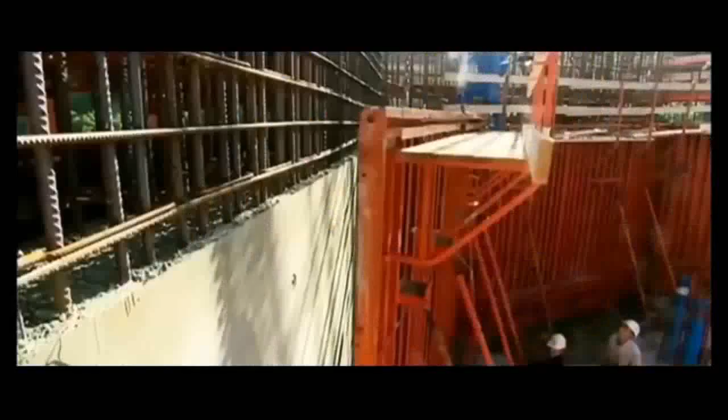When I've shown first the drawing of this bridge, they really thought I was crazy. The team attempting to build this amazing freeway in the sky had to survive landslides, fight winds gusting at 130 kilometers an hour, and weather massive storms as the bridge simply hung in the balance. It's a bridge that pushes the boundaries of engineering to the limits, and then beyond.

Imagine building a series of Eiffel Towers, then slinging a 4-lane highway between them, all the way across one of the deepest valleys in France. Impossible though it sounds, that pretty much describes the building of the Millau Viaduct.

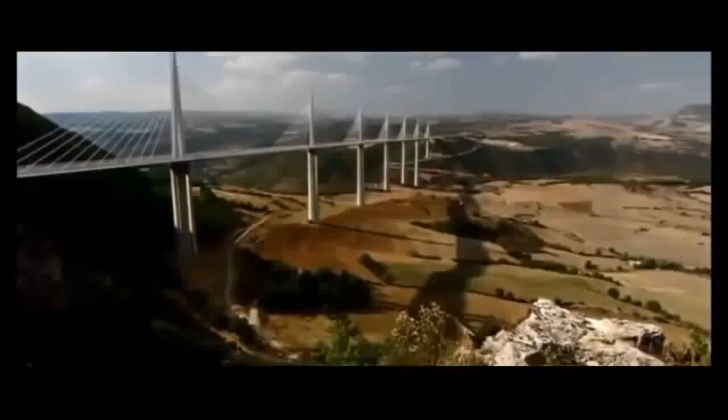From the start, the construction team faced 3 daunting challenges. One: build the tallest bridge piers in the world. Two: put a 36,000-ton freeway on top of them. And three: erect 7 steel pylons, each weighing 700 tons.

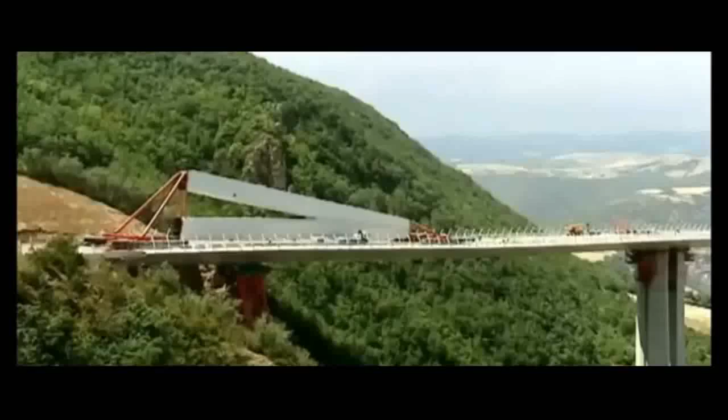And what's more, they had to do this hundreds of meters above solid ground. So high that if you were on top of the Eiffel Tower, you'd still be looking up at this awesome bridge.

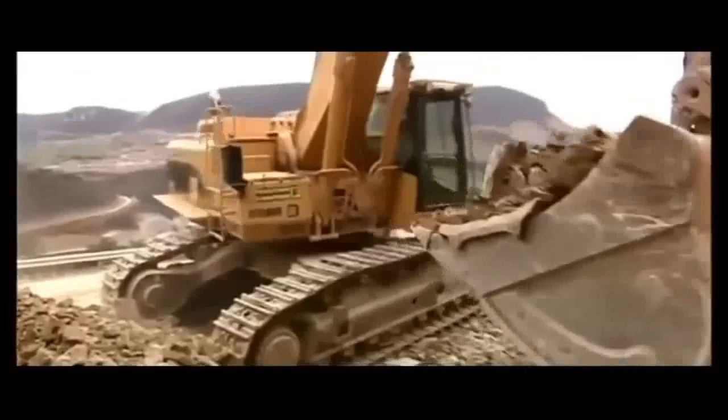October 2001, the team break ground. They're required to build a bridge that'll last for 120 years. And to win the contract, the teams promised to build it in record time, less than 4 years. By comparison, the world's longest suspension bridge, the Akashi Kaikyo in Japan, took a full 10 years to build.

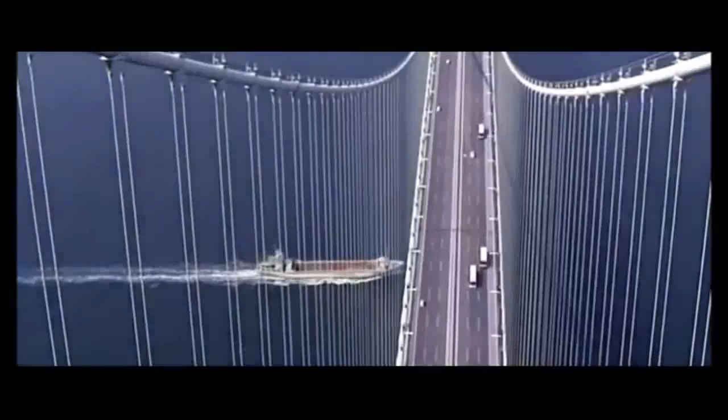To up the ante, any delay will cost them $30,000 a day in penalties.

There are 7 piers that are numbered from the northern end of the valley. Number 1 will pose problems because of the steep slope. Number 2 will be the biggest challenge since it's the tallest. Crossing the river, number 3 is not much shorter. Then 4, 5, 6, and 7 climb the gentler slope to the south.

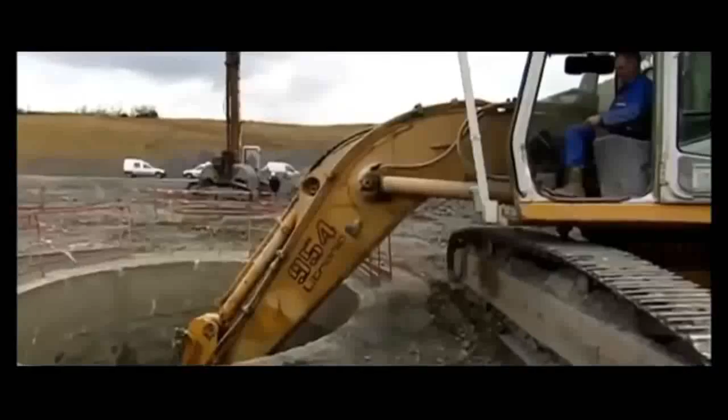To begin, the team had to bury the foundations deep in the bedrock in order to support the enormous weight the bridge will place on them. But the forces of nature were stacked against them.

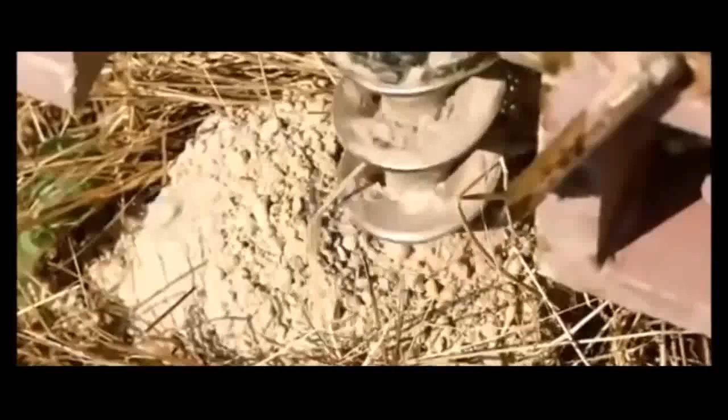Geologists have warned of the risks posed by the region's fractured limestone. The rock is full of cavities that are essential to the local cheese economy. These cave systems, close to Millau, are home to a unique bacteria responsible for the blue mold in the world-famous Roquefort cheese. But what's perfect for cheese could be disastrous for a megastructure.

The geologist's diagnosis spelt one thing: landslides. This kind of catastrophe could jeopardize the entire project. Despite the warnings, building went ahead as planned.

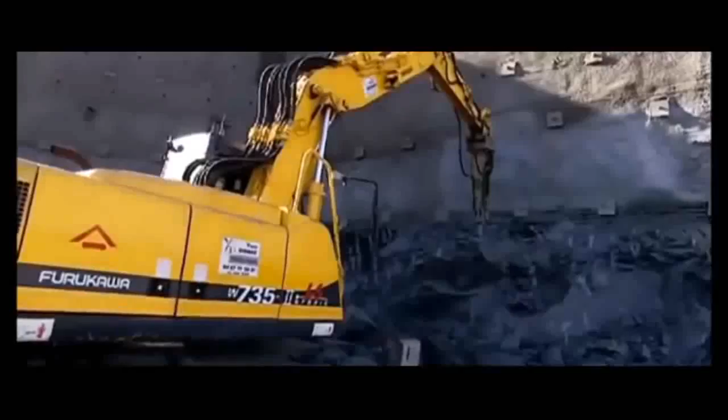Then, well into construction, as predicted, a dramatic storm causes a landslide. 4,000 cubic meters of rock collapse around Pier 1. Fortunately, the fallen rock doesn't damage the pier, but the warning is clear. They're forced to divert precious manpower and equipment to stabilize the slope and prevent a repeat collapse.

So if the area is prone to landslides, why did they build the world's tallest bridge here in the first place? The answer is simple. In the 1980s, France built a freeway linking Paris directly with Spain. This major artery headed south across the French countryside, while from the Mediterranean, the freeway headed north, until they both hit one of the deepest valleys in France and stopped dead.

Welcome to Millau, France's least favorite bottleneck. The town of Millau is in the mountainous region of the Massif Central, one of the most tranquil parts of France. But in summer, this poor medieval town suffered traffic hell.

The locals couldn't take it anymore. Neither could their mayor. It was terrible for our reputation. When you hear every day on the television and radio, avoid Millau, there's a traffic backup, a 5-hour wait in Millau.

And it's not just the people of Millau. Two drivers, Jamila and Jemima, crossing the 30-odd kilometers between the freeway on either side of Millau, reveal exactly why this bridge is needed. Jamila, in car 33, will cross the new bridge, while in car 22, Jemima will take the old road across the valley floor.

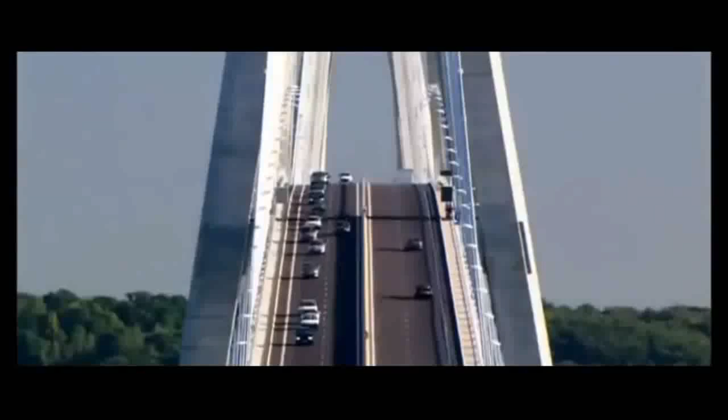With this record-breaking structure completed, Virlogeux was on to his next, Millau. His plan, another cable-stay bridge, but pushing the technology beyond anything previously attempted, with piers 4 times higher than the Normandy Bridge.

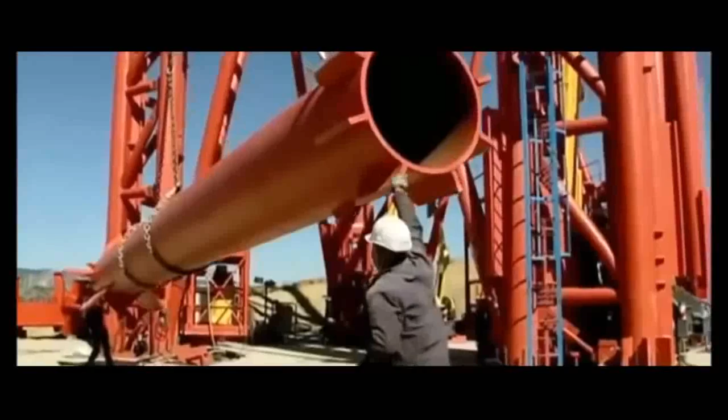The Millau Bridge would not only be the world's tallest, it would be unlike any bridge ever constructed. When I first showed the drawing of this bridge to the government authorities, they really thought I was crazy.

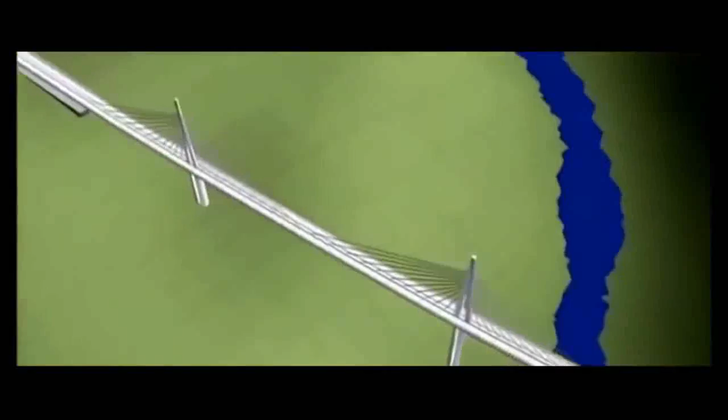Virlogeux's Normandy Bridge has two sets of cables supporting the deck, but he wanted to up the stakes for Millau by losing one row of cables, so the remaining line would be forced to do twice the work. More dramatically, the 2.5-kilometer Millau Bridge, instead of having a single main span, needed a whole series of piers to support it across the valley. No bridge builders had ever attempted a multiple-span, single-line cable-stay bridge on this scale before.

The French authorities had a problem. Nervous about Virlogeux's groundbreaking scheme, they held a competition inviting other engineers and architects to compete with different designs. The winner, Lord Norman Foster, is one of the world's superstar architects.

In Hong Kong, he built the world's largest airport terminal. In Barcelona, offices literally hang from a mast on his communications tower. This is a man who regularly contemplates the impossible and delivers.

It's the challenges, one challenge on top of another, on top of another. And with Millau, one of the biggest challenges was making it fit into the landscape, given it's just down the road from the famous Gorge du Tarn, France's equivalent of the Grand Canyon. How do you make something which has to be so immensely strong against the forces of nature look very gentle, very delicate? How do you weave something on that scale into the most unbelievable landscape?

Ironically, Foster's answer was to take Virlogeux's pioneering scheme, then push it one stage further. He turned an elegant piece of engineering into a delicate work of art by boldly cutting out two of the nine original piers and seriously slimming down the remaining piers and road deck.

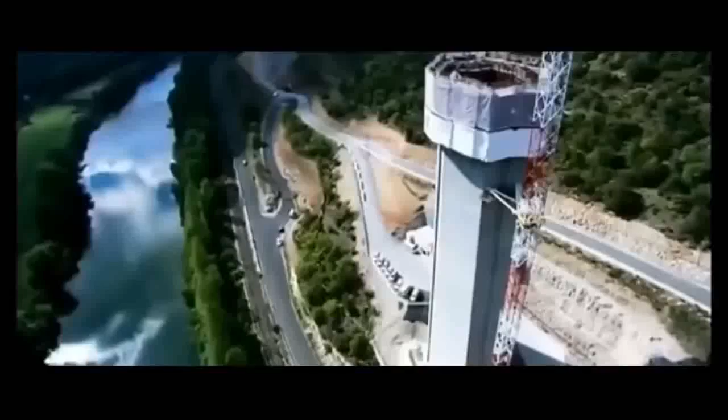December 2001, France's Millau Viaduct, the tallest bridge in the world, is under construction. Everything about this project is supersized. It'll need 200,000 tons of concrete, so much that the team have to build a concrete factory on site. But there's nothing straightforward about this concrete. The formula must be just right.

It needs structural strength to support the massive loads it'll have to bear. But it can't set too quickly, as it has to be hoisted into position and poured hundreds of meters in the air. And it needs to be just the right color to suit Norman Foster's vision.

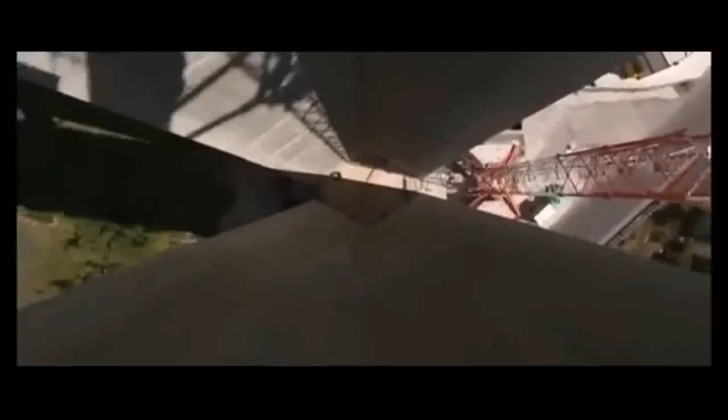In fact, the architect's vision has created a headache for the construction team. He's designed each pier as a complicated geometric shape, tapering the entire way up with vertical grooves set into them to create shadows. But what's just a line on paper for the architect was a major challenge to build.

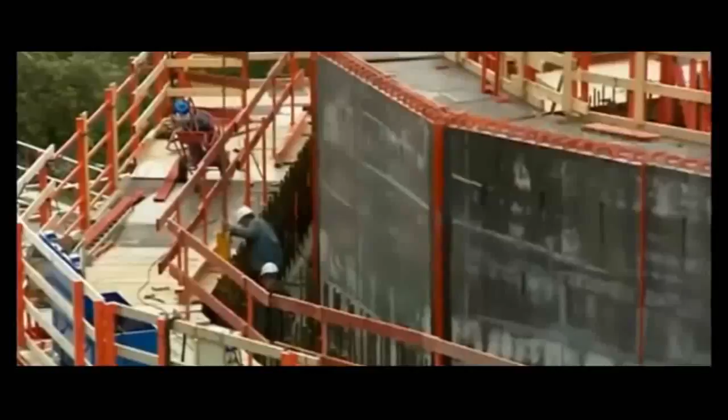The enormous piers are built step by step by pouring concrete into a temporary mold. To give the required strength, the molds are filled with a frame of steel reinforcing bars. In total, 16,000 tons of these steel bars are hoisted into place and secured. Laid end to end, they'd stretch the 4,000 kilometers from Millau all the way to Central Africa.

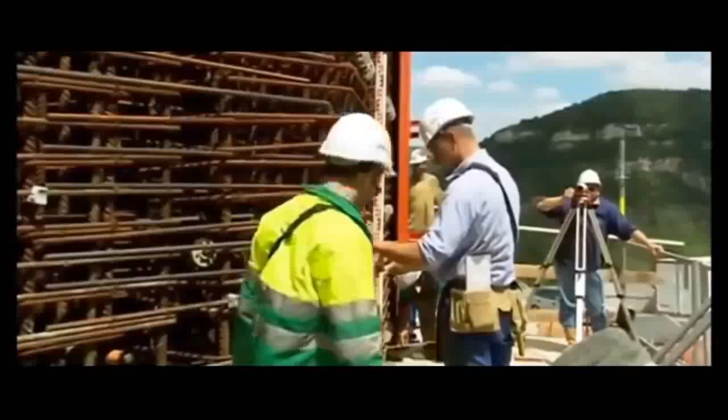The shape of each pier is seriously complicated. As a result, each time they remove the sections of red steel shuttering, they have to change the shape of the mold to fit the profile of the next 4-meter section. Manhandling these steel panels weighing up to 15 tons apiece is no picnic. And with the combined height of the 7 piers totaling well over a kilometer, they have to change the shape of the mold over 250 times.

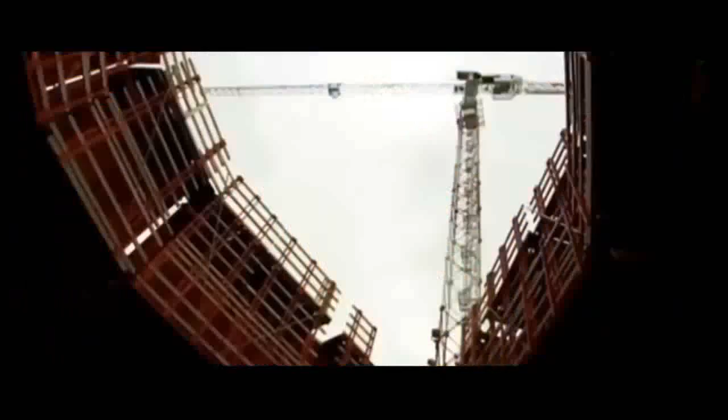Every 3 days, each team on each pier went through this whole cycle, then repeated the process. But it was a race against time, with a permanent threat of delay. Keeping the entire build on time and to budget was the daunting responsibility of one man, Jean-Pierre Martin.

If instead of 3 days we took 4, imagine that multiplied by the number of castings. We'd end up with a 3 or 6 month delay. With a penalty of nearly $1 million a month, this isn't something Martin wanted to contemplate.

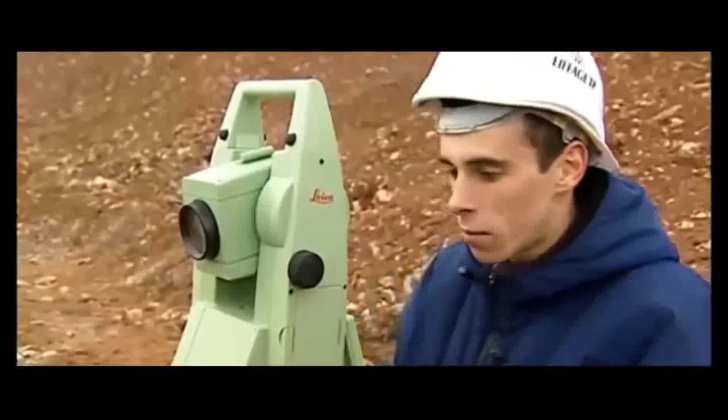And this schedule wasn't his only headache. You have to be pinpoint accurate when you're building the tallest bridge piers in the world. Get it wrong, and the bridge simply won't fit together. Just 10 centimeters out, about a hand's width on each 4-meter section, and the tallest pier could be 6 meters off at the top, the width of a jumbo jet fuselage.

Each team was aiming for a specific point in the sky. For Pier 2, this was exactly 245 meters above the ground, 546 meters from the north side, and 1,914 meters from the southern end. There was no room for error.

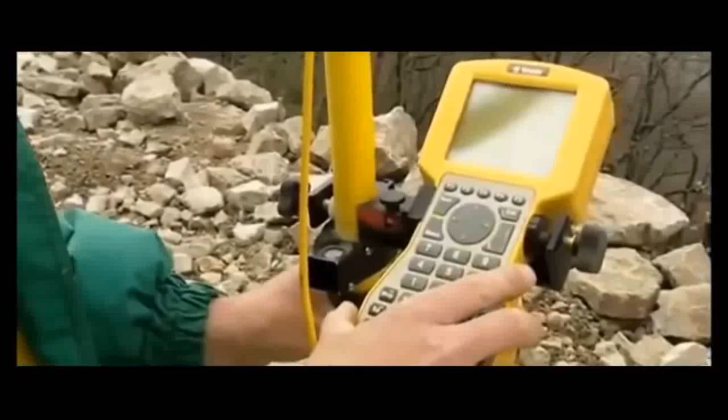The only chance they had to get it right was with GPS, accurate to within 4 millimeters. Using signals from multiple satellites, the team could pinpoint their position and make sure they're on target for that critical point in the sky they needed to hit.

Month after month, the piers climbed higher. Finally, by November 2003, they reached their full height. At 245 meters, Pier 2 becomes the highest bridge pier in the world.

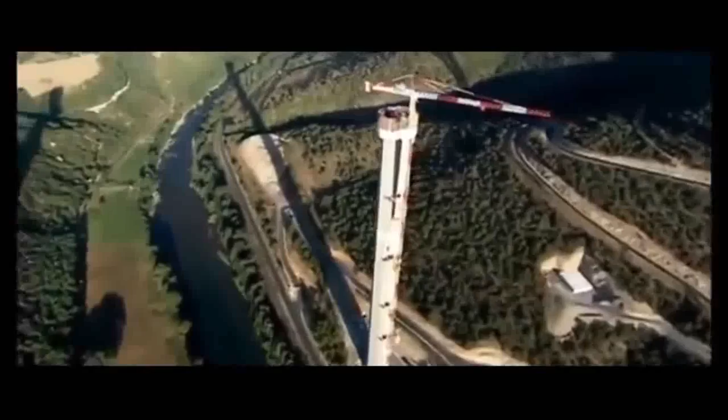But is this record-breaking pillar where it's supposed to be? Amazingly, it's dead on target, to within 2 centimeters. Champagne corks pop. It's time for a major celebration.

Against all the odds, they were 1 month ahead of schedule, but the team couldn't afford to relax. The next stage of the project would be the most difficult part of the build.

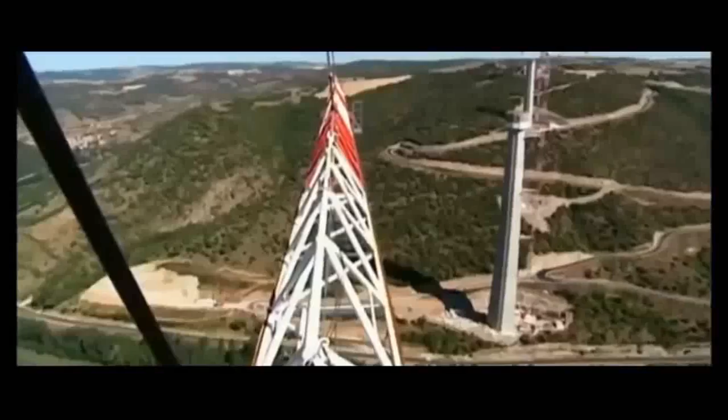Phase 2 of building the world's tallest bridge involved putting a 2.5-kilometer roadway weighing 36,000 tons on top of the piers, a full 270 meters above the River Tarn. Bridge builders know danger comes with the territory, but working at these heights can be lethal.

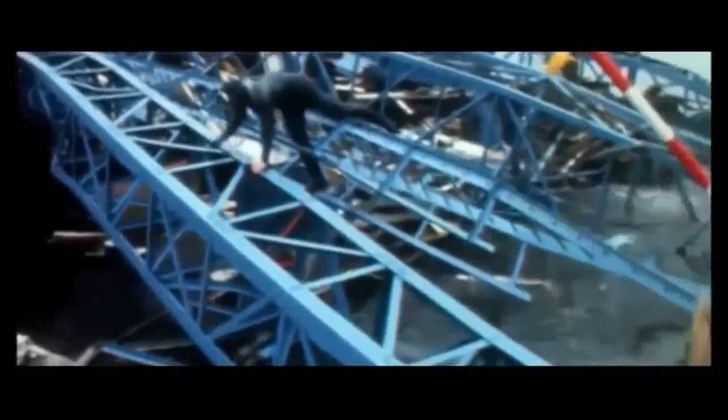With these fatalities in mind, the team decided to fabricate the entire road deck on the safety of solid ground. This meant building it in steel, which in theory would be much safer than lifting vast concrete sections hundreds of meters into position.

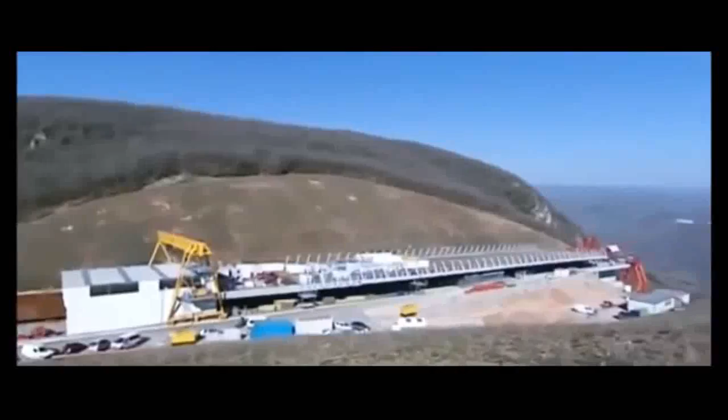There's only one problem with this plan. No one had ever put a road deck on piers anything like this height before, let alone over a 2.5-kilometer span.

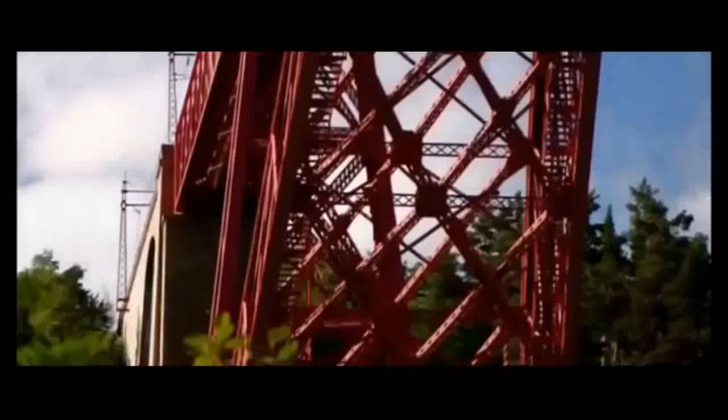In the end, only one steel manufacturer had the courage to take on this colossal challenge: Eiffel, the steel firm set up by the great French engineer. Eiffel built what was once the tallest bridge in the world, the Garabit Viaduct in southern France, before getting round to the framing for New York's Statue of Liberty and, of course, his signature tower in Paris.

But despite the company's experience, Eiffel's director, Marc Buonomo, knew he was taking a serious risk. It was a gamble for the company, because if there had been a mistake, if it hadn't worked, it would have been the whole company.

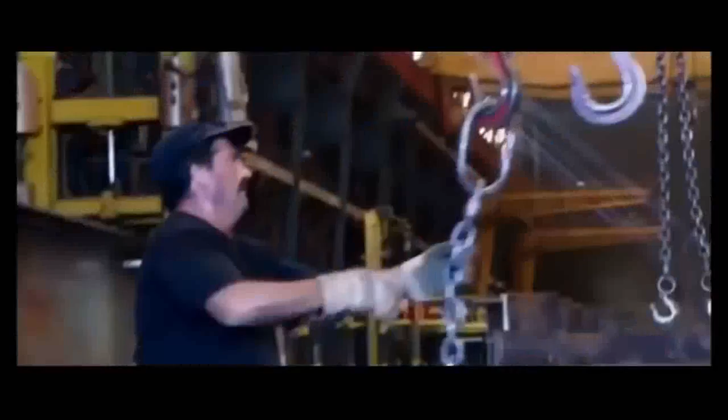They fabricated the massive sections that would make up the road deck in the company's steel factories. This immense jigsaw puzzle involved manufacturing 2,200 separate sections, weighing up to 90 tons, and some of them 22 meters long.

Their accuracy is measured with a laser to within a fraction of a millimeter. The huge square tubes are the central spine that should make the deck rigid. The triangular side panels will be welded on either side to create the width for a 4-lane highway.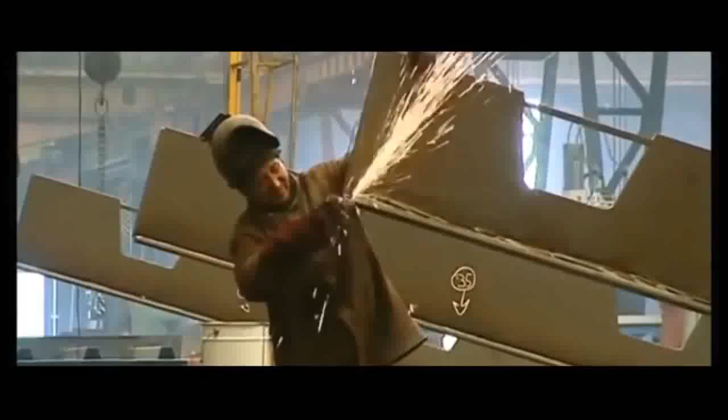To meet the punishing schedule, Buonomo automated the manufacturing with a 2-headed welding robot and a plasma cutting machine. Each cutting pattern or template is programmed into the computer. Then the machine automatically blazes its way through the steel. The torch reaches a scorching 28,000 degrees centigrade, 5 times the temperature of the Earth's inner core.

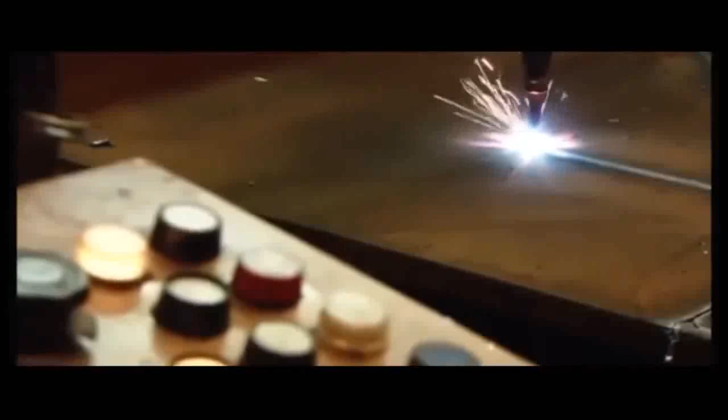But cutting and welding was the easy part. The hard part was getting these monster sections the hundreds of kilometers from the factories to Millau. The routes had to be planned with precision to avoid major damage. The police coordinated safety and clearances. Even with that level of preparation, some obstacles felt as if they're cutting it just too close for comfort.

And this was no one-off event. To build the viaduct took over 2,000 of these extraordinary road convoys.

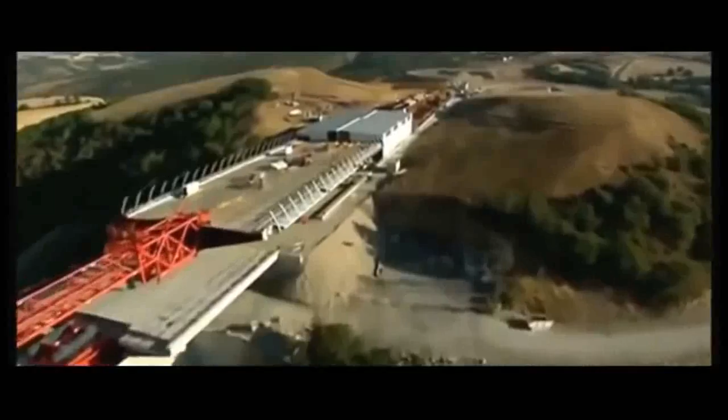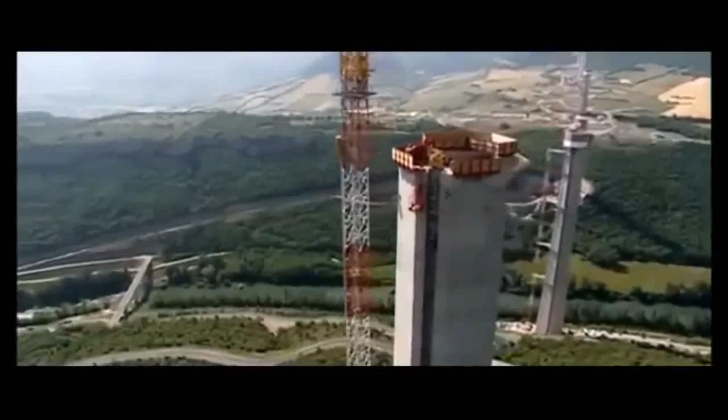The components arrived at assembly plants set up on either side of the valley. Here, the pieces of a massive jigsaw puzzle were welded together to form the two halves of the deck. But getting these two halves to span the valley on top of the world's tallest bridge piers would be a major challenge. They'd be the first team to put a road deck on a pier taller than an 80-story skyscraper. Pushing bridge building beyond anything attempted before, they planned to slide the entire 2.5-kilometer road deck over in two colossal pieces. The bridge's chief engineer, Jean-Marie Cremer, was one of the few people who believed it could be done.

All the engineers who knew this method, who were in the know, didn't believe it was possible. If the team had got their calculations wrong, the entire structure could collapse into the valley.

We found a solution for the construction, which was to launch the bridge from the two sides - one part on the Larzac Plateau, one on the Rouge Plateau - and to push them from the two sides and make them come and meet here above the River Tarn.

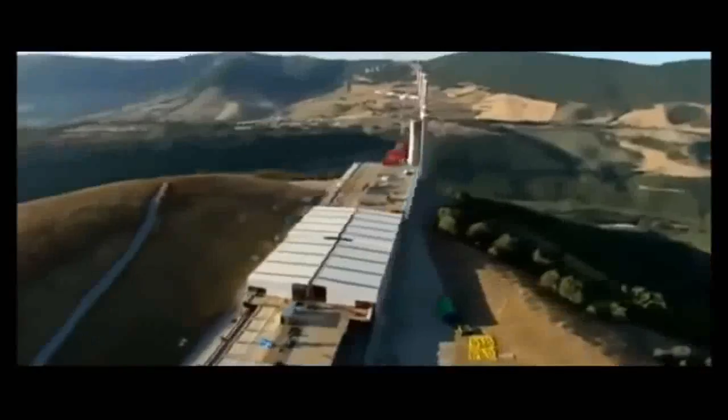Smaller bridges use a similar technique. A powerful set of hydraulic rams literally pumps the deck from one side to the other. But Millau would be the longest launch ever attempted over the highest piers in the world, and the results could spell disaster.

The deck is so slender, it would bend and collapse if it were pushed out over the 342-meter spans between each pier. The furthest anyone's previously managed is less than half that distance.

The first part of the solution was simple: fit a pylon so its cables support the front of the deck as it goes out over the valley. Then construct temporary steel support towers that halve the spans to a more manageable 171 meters.

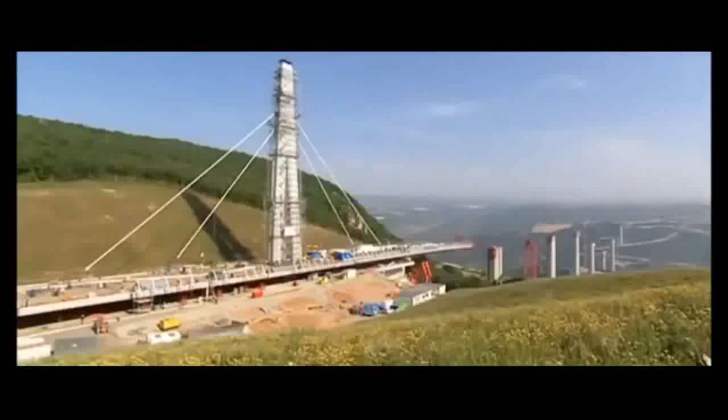These steel towers were a construction feat in themselves. The largest, over 170 meters high, is the tallest ever built, and they needed to carry a massive load - 7,000 tons as the leading edge of the deck, together with the first 90-meter pylon, slide over.

Simply pushing this enormous weight over the top of the vulnerable piers would bring them crashing to the ground. This was the nightmare scenario. If we'd done a conventional launch, we would have knocked the piers over like the pins in a bowling alley.

Someone needed to reinvent the way this type of bridge is built. It's Marc Buonomo with Jean-Marie Cremer who came up with the breakthrough. The basic principle can be demonstrated with a heavy box and a wobbly table. With a normal launch, you knock over the piers.

I want to advance the deck over the pier, but if I push the deck from here, I'd knock over the piers because they're so tall. The idea is to install a launching system on top of the pier, and that way, if I push the deck, it has no effect on the stability of the piers, and the piers won't fall over.

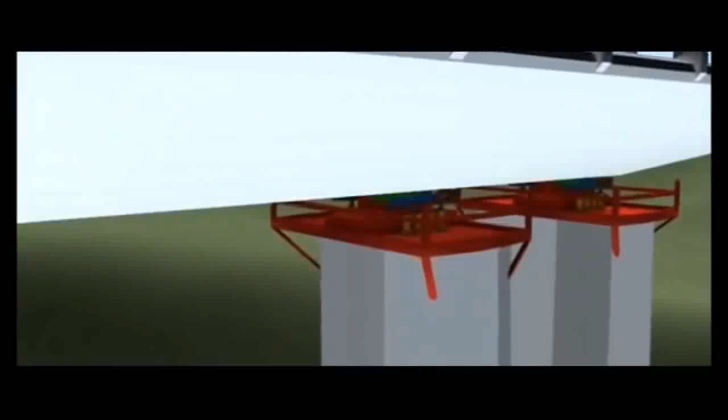The trick is to use a series of these launching systems to jack up the deck and inch it forward. Each system uses two wedge-shaped blocks under each side of the deck. The upper wedge is pulled forward by a hydraulic ram. It slides up the slope of the lower wedge at the same time, lifting the deck from its supports and advancing it 600 millimeters. The lower wedge then retracts, dropping the deck onto its supports.

The upper wedge returns to its original position, and the whole cycle begins again. Four of these clever devices are placed on each pier, all programmed to work at exactly the same time. The result is that together, they pick up the entire roadway and shunt it forward. But if one fails or gets out of step, it could spell disaster - the force could push the bridge piers apart till they collapse.

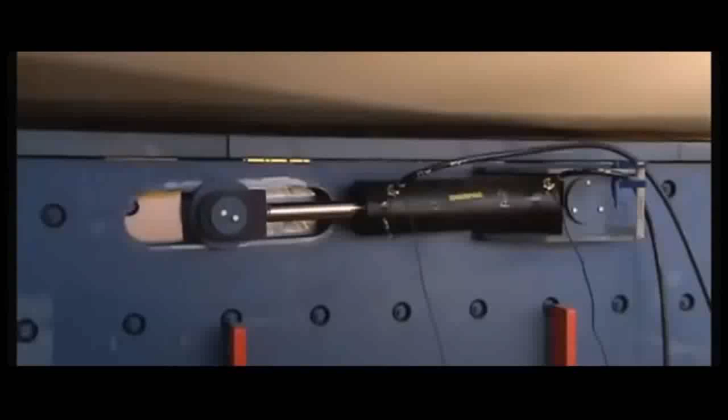When you're up there and you see Millau 300 meters below you, you ask yourself, was this a good idea? The future of the entire project was now hanging on a prototype, and it had never been tested.

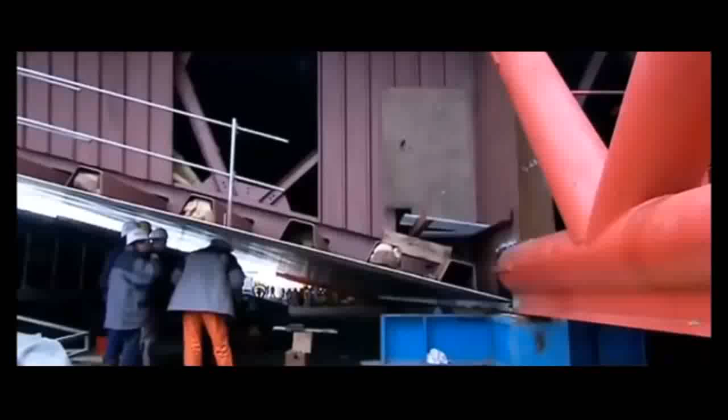It's the morning of February 26, 2003 - do or die day for the world's tallest bridge. Everything is about to be put to the test: the flexibility of the deck, the strength of the temporary piers, and critically, the pioneering hydraulic ram system.

Even Buonomo, the man in charge of the launch, had his doubts. As it had never been done before, I have to tell you, I had fears that it wouldn't work.

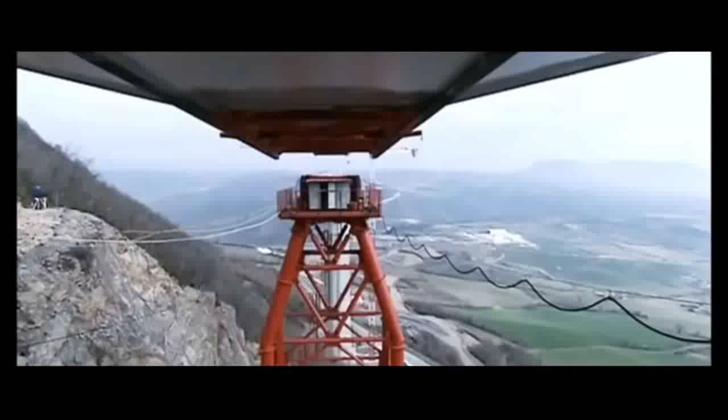The pumps kick in, the pistons start to push, and the deck begins its huge journey across the valley. The moment I heard the motors start, I put my finger on the deck, and I could feel my finger move. Every four minutes, the deck advanced 600 millimeters across the valley. Surveyors tracked its progress, but it was still a nail-biting time as they watched the unsupported deck crossing the void.

Eventually, the deck reached the safety of the first pier. 204 meters down, only 2,256 to go. The launching system seemed to be working as planned, and the engineers were feeling optimistic.

But as the deck advances into space, it'll become more vulnerable to the wind, which can reach 130 kilometers an hour. Unfortunately, the road deck has the shape of an upside-down airplane wing, and the team's greatest fear is that this wing could simply take off.

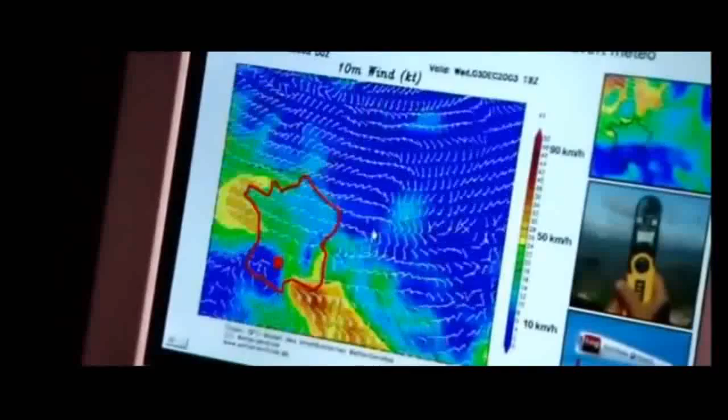The engineers kept a close eye on the wind and weather conditions. When they were satisfied there was a 3-day weather window and the wind wouldn't exceed 85 kilometers an hour, they'd give the construction team the go-ahead, and the deck launch could continue.

The reason for this precaution is simple: strong winds can literally tear a bridge apart. In 1940, Washington State built a suspension bridge across the Tacoma Narrows in the U.S. Northwest. It opened with a grand ceremony on July the 1st, but the celebrations were short-lived. The bridge had a major problem: the wind.

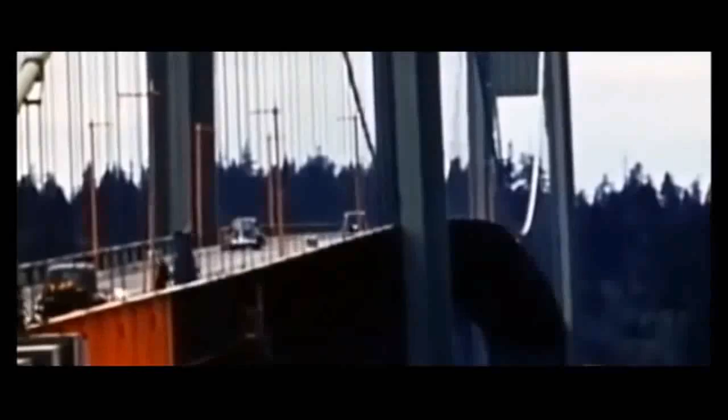Girders beneath the deck, designed to make the bridge rigid, actually blocked the wind, causing the roadway to ripple alarmingly. Locals soon dubbed it Galloping Gertie. On the 7th of November, with the wind less than 70 kilometers an hour, the bridge begins to twist violently. At 11 a.m., time runs out for Galloping Gertie. The wind sends the bridge crashing into the river.

Wind tunnel testing is now standard procedure as a direct result of Galloping Gertie. For the Millau Bridge, they analyzed the wind in the Tarn Valley over 18 months, then recreated those conditions in the wind tunnel. Wind engineer Olivier Flamand was shocked by the results: the average wind speed was relatively low, but because there's such strong turbulence, it created very fast peak winds.

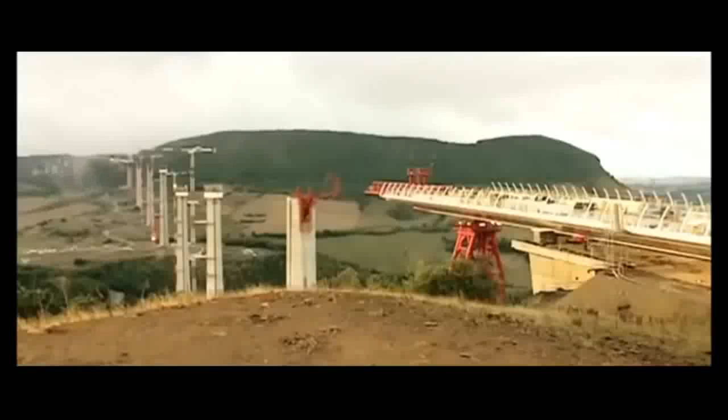The rugged terrain creates serious turbulence at the height of the road deck. Winds peak at 130 kilometers per hour. That's hurricane force. They tested every aspect of the bridge to analyze the risks: piers, pylons, and critically the deck.

But it's not just the aerodynamics of the finished bridge. They needed to find out how it would behave when it was most at risk, during the launching of the deck. Olivier and his team reached a chilling conclusion: the winds they've measured are strong enough to blow the unsecured deck off its supports and send it crashing hundreds of feet to the valley floor.

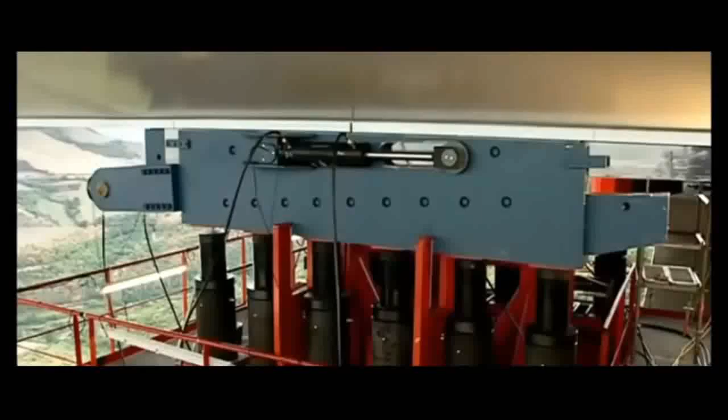And then the nightmare began. On the 22nd of August 2003, 6 months into the deck launch, one of the launch systems failed, leaving the deck hanging in the wind. To make matters worse, the weathermen were predicting storms.

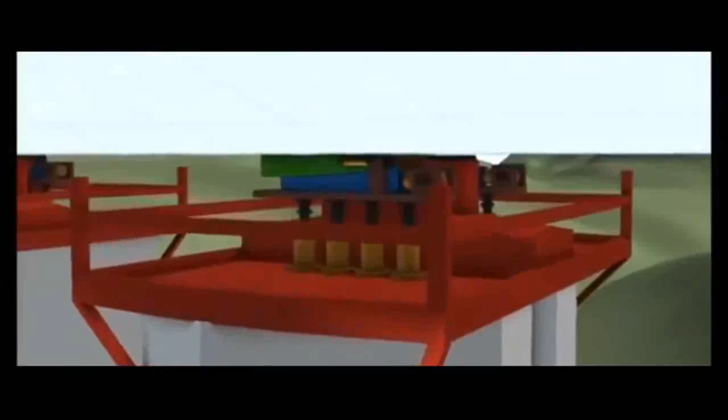So far, these massive pumping machines had worked perfectly. But the fact is they were prototypes, and due to the frantic schedule, they'd never been tested. The problem was that the non-stick Teflon between the sliding surfaces had ripped, and the friction generated was too much for the hydraulic rams to push against.

Unfortunately, no one had planned on replacing parts of this monster machine mid-launch on the top of a massive concrete pillar. This was very bad news for the man who staked his reputation on this system. It was maximum stress, like poison in your mouth. You don't forget that.

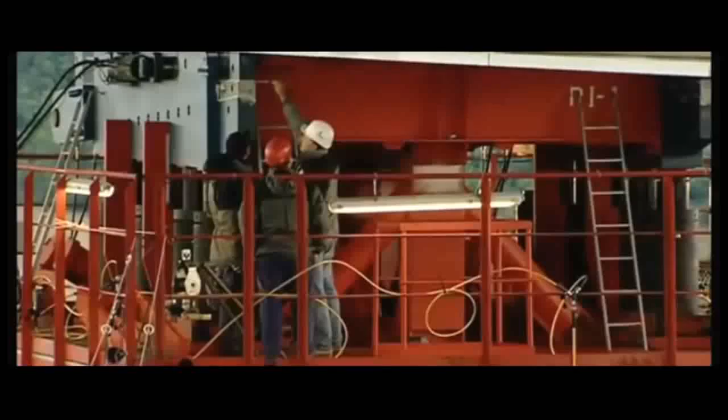Re-examining their calculations, they realized the cause of the problem. They'd underestimated the forces between sliding surfaces, but they wouldn't be able to repair it without the necessary spare parts. The clock was ticking, and Marc Buonomo needed a solution fast.

When Apollo 13 came back with that incident, the NASA engineers requested they did the inventory of everything there was on board to know how to fix it. The Millau team did an inventory. They realized that the other launching machines, not yet being used, could be stripped to provide the new Teflon surfaces they needed.

Working all through the night, the team extended the access platform. This allowed them to take out the 5-meter-long, 2-ton steel wedges, replace the Teflon, and reassemble the launching machine. By 8 a.m. the next morning, it was ready to resume the launch.

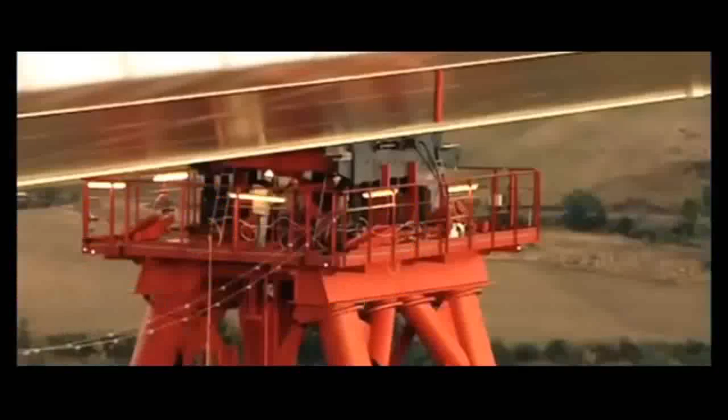The rest of the week, the predicted storms arrived, and another set of launching machines wore out. So when the deck finally made it to the safety of the next pier, the team breathed a major sigh of relief. You don't forget that. I won't forget that for 4 hours I was really scared.

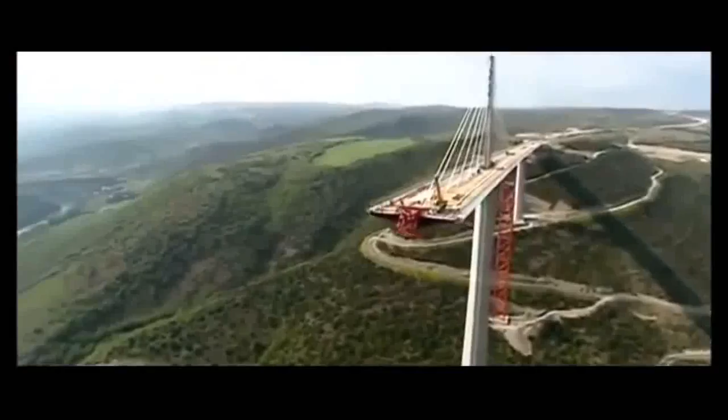The two decks continued their journey across the valley, day after day, week after week for a full 14 months. They approached each other, millimeter by millimeter. By May 2004, they'd reached a critical phase. From the northern end, the shorter deck had traveled 717 meters into space to reach its final resting place. From the south, the longer deck extended over 1.5 kilometers. Only the section over the river, the one point where it was impossible to erect a temporary pier, divided them.

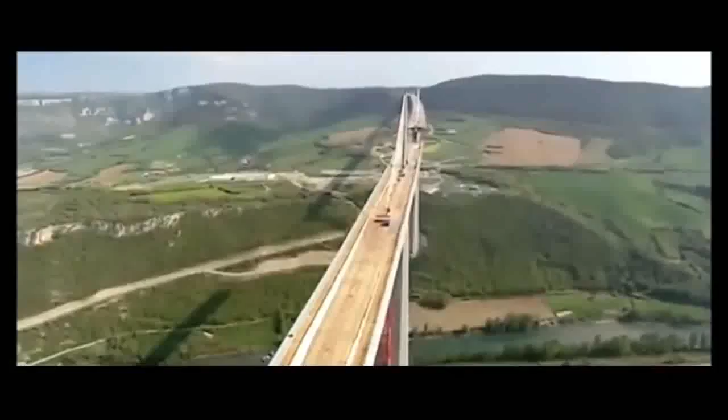But would they meet as planned? If they've got their calculations wrong, they'll have built the biggest white elephant in Europe.

Even the man behind the whole project had his doubts. I was not convinced at all that the two parts of the deck could meet exactly with a perfect geometry.

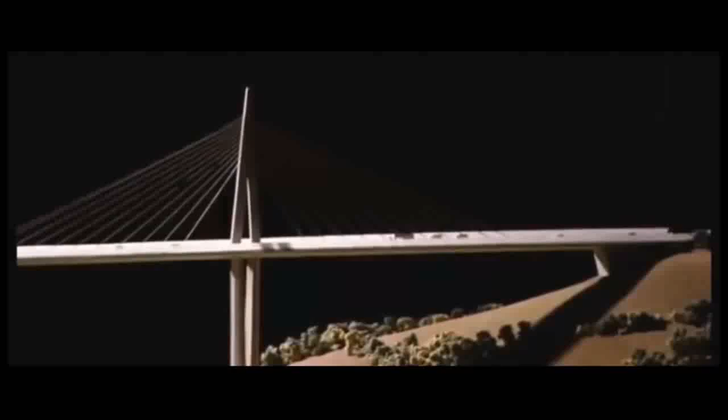The odds were against them. Calculating such a feat so precisely is a Herculean task. Firstly, the two starting points on the northern and southern slopes of the valley are at different heights. Secondly, the bridge has a subtle curve to it. As a result, each steel panel which makes up the road deck had to be cut and welded with extreme precision. It would be an engineering triumph if they got these two sloping curved decks to meet as required.

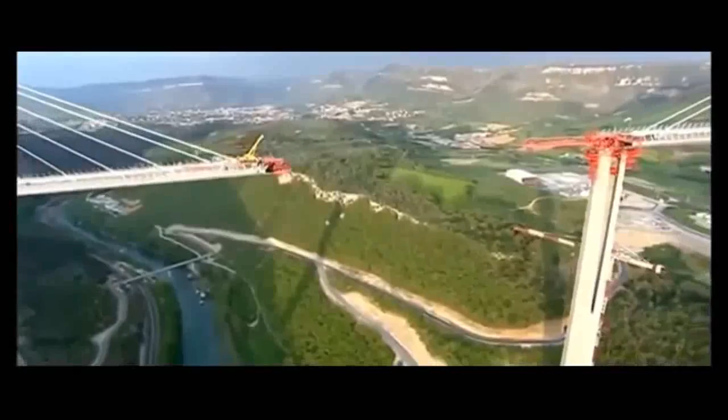The team checked the weather reports. With the wind inside safety limits, they gave the go-ahead for the final push. The rams began to drive the deck's leading edge off the safety of Pier 3 towards its destination. At this point, a total of 21 launching systems needed to move at exactly the same moment to avoid disaster.

If anything were to go wrong now, the man responsible would be Marc Buonomo. Everyone asked me, how can you be sure that it will go straight? So to be sure that they were going to the right place, I had a GPS put on the front, so I could see the gap between the theoretical and the real position.

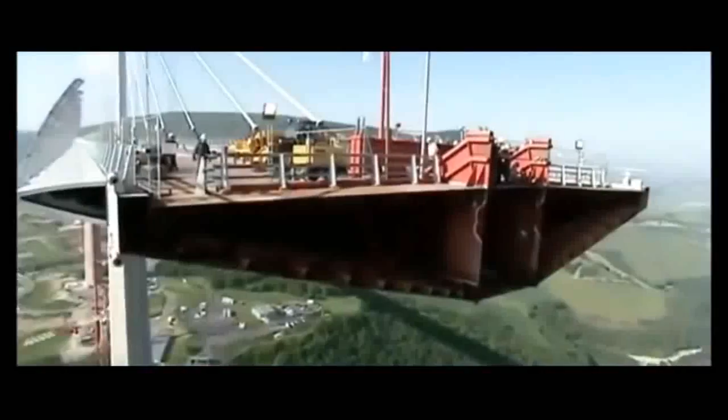Over the next 2 days and nights, the deck advances 600 millimeters at a time towards its final resting place. The world's media are watching the critical meeting of the decks, and to add to the pressure, the French Prime Minister is due to drop in to celebrate the event.

The deck pushes forward. Now, with only centimeters separating the two sections, a magnum of champagne is hung between them to mark the moment.

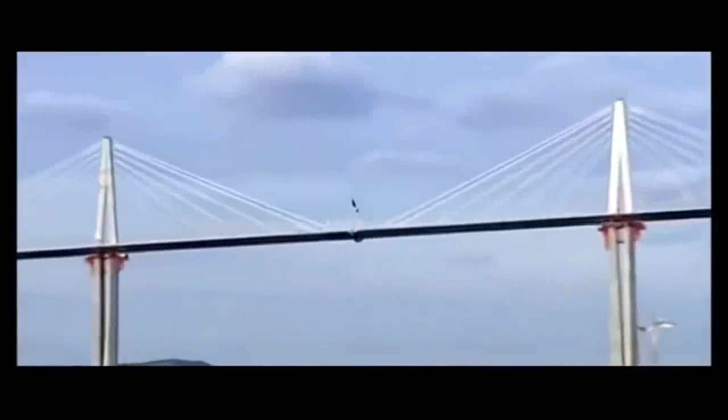At last, union. The two massive steel decks have traveled high over this valley, a total of 2.5 kilometers, and when they check, they're aligned to within 1 centimeter. That's accurate to within 99.9999%. All the measuring, all the calculations have paid off. They've nailed it.

The meeting of the decks was a special moment. News reports traveled round the world, and in Salzburg, Austria, they reached Felix Baumgartner, aka Felix the Conqueror.

Felix has made a career base jumping from some of the tallest structures on the planet, and within 24 hours, he'd driven to Millau and was calculating the logistics for the jump, factoring in his two main aims: to avoid arrest and death.

Baumgartner waited for darkness before arriving on site. He found his way to the base of Pier 2, then climbed an access ladder the full 245 meters to the top. He entered the steel road deck and found a place to hide until daybreak. He had to remain concealed until the sun was high enough for his cameramen to record his world record attempt.

At 7 a.m. the following morning, Felix the Conqueror emerged. He took a cool backward flip off the tallest bridge in the world and entered the record books. The tallest bridge in the world, 250 meters. I did it. And having evaded death, he made sure he's not caught by the police.

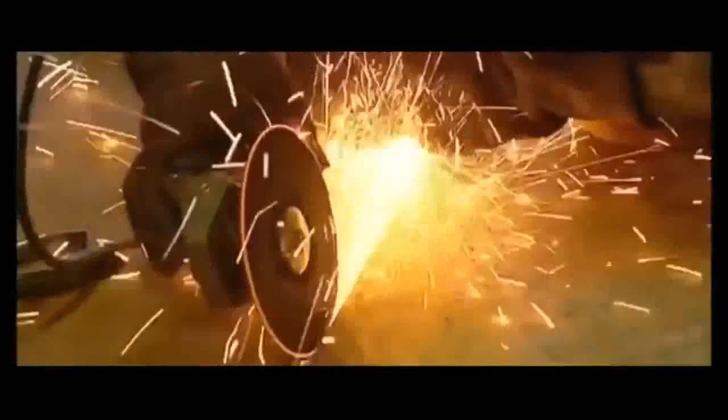The decks have been joined, and the team have reached the final phase of the project. But there was still a race to meet the schedule, and their problems weren't over yet. Everyone could see the dramatic undulations in the flexible steel deck. Even some hardened bridge builders wondered about its structural integrity.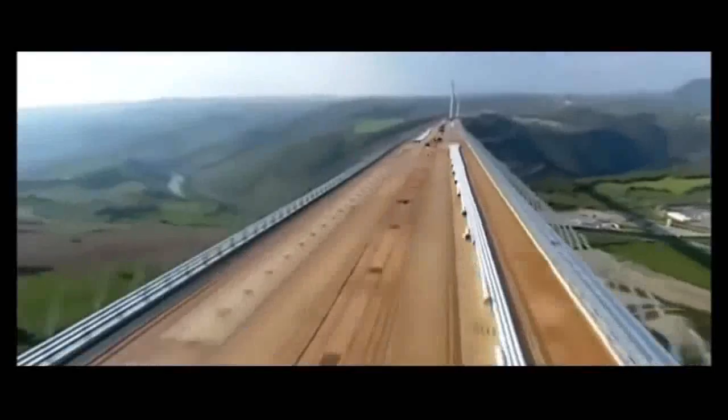It was a huge surprise for everyone. All the engineers said, we knew steel was flexible, but not that flexible. The team were relying on the pylons and cables to pull the deck straight. Each massive pylon is 90 meters high and weighs 700 tons, the equivalent of 85 London buses. Placing them in position on the slender deck, high above the valley floor, would go beyond anything ever attempted.

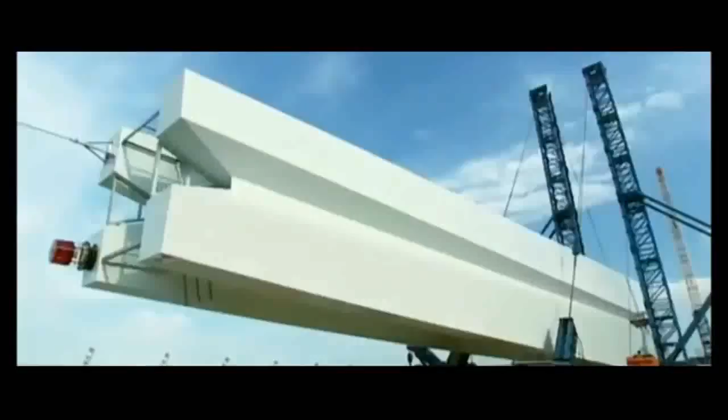Once again, Marc Buonomo had a plan. You know, the first people to make vertical pylons were the Egyptians. Buonomo adapted a technique used in ancient Egypt to erect obelisks in the sands.

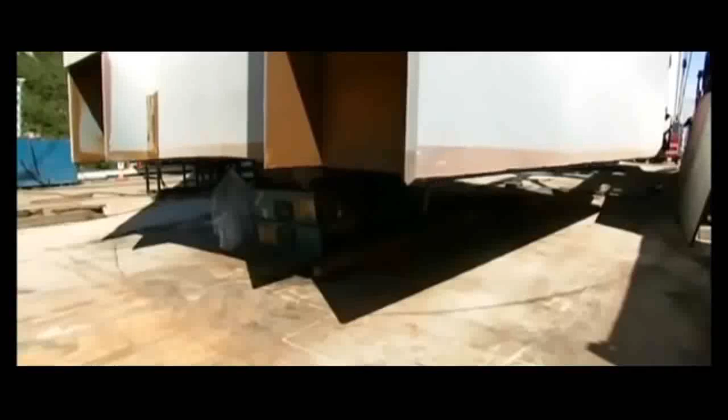On top of the road deck, the team put up two enormous steel towers, both of them secured by cables and equipped with a hydraulic system capable of raising 1,000 tons. The 700-ton pylon is then lifted by the hydraulics. As it rises, it pivots little by little until it's vertical. It's then lowered safely onto its anchorage point. Buonomo's 4,000-year-old technique worked to perfection.

With all 7 pylons in place, the team could attach the cable stays that would straighten the rippling deck and give it the strength to cope with full traffic loads, they hope. The weight of the roadway is now over 40,000 tons, the equivalent of a cruise ship, and the 154 cable stays should prevent it from sagging or collapsing.

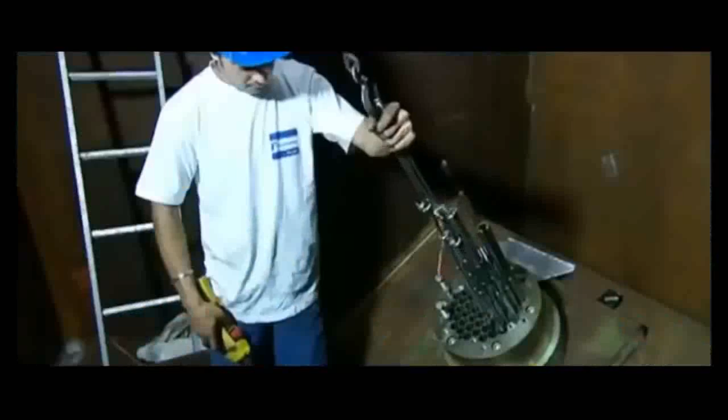The strongest stays are made up of 91 individual steel strands and have a breaking strength of 2,500 tons, strong enough to hold back 25 jumbo jets, all at full throttle.

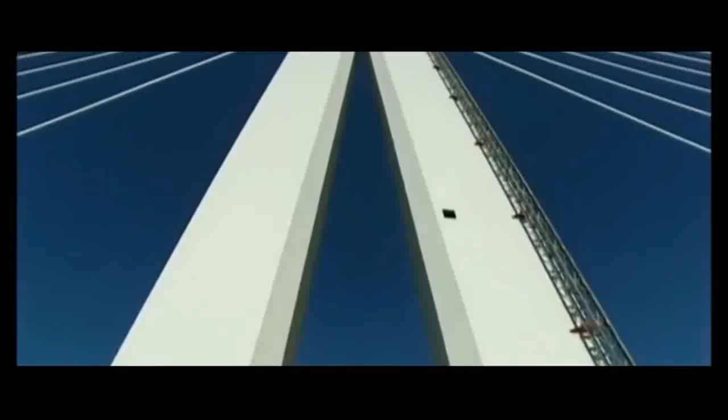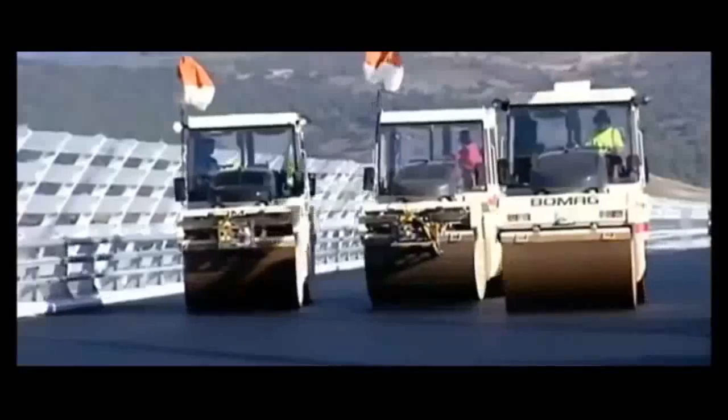As the cable stays are tensioned, true to plan, the ripples in the road deck are pulled straight. Over the 2.5-kilometer deck, the ripples are now no larger than the size of a thumb. They're finally on the home straight. The road surface goes on, adding a further 10,000 tons to the load. That's like driving 153 battle tanks onto the deck.

But before it could open to the public, the team needed to know the bridge is safe. It would have to pass one crucial test.

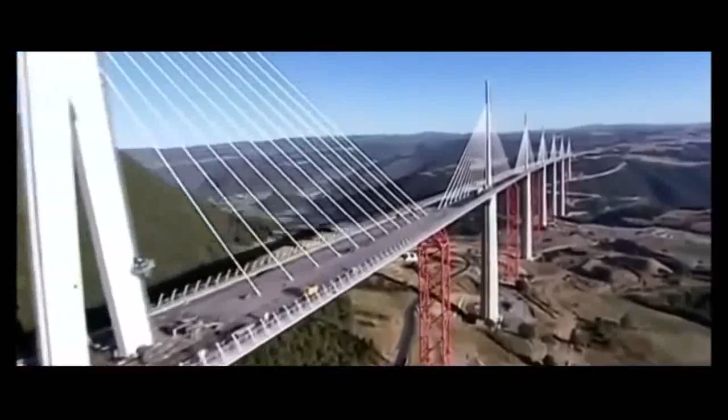After 3 years, the construction team building France's Millau Viaduct, the world's tallest bridge, are about to find out if they got their calculations right.

On a single-span cable-stay bridge like the Normandy Bridge, a large load on the main section is no problem because the cables are attached to solid ground and can't give. On the Millau Viaduct, with its 8 spans, the cables are attached to the deck of the adjacent sections. A load on one section will cause it to drop, pulling the stays down. As the pylons lean in, the matching stays are pulled upwards, lifting the neighboring decks and causing a dangerous rippling effect.

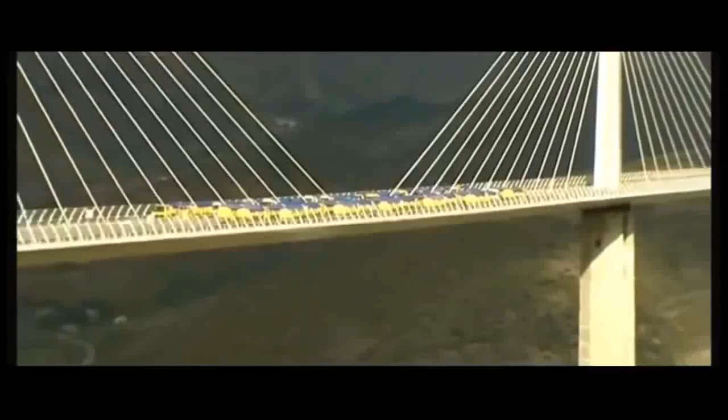It's right now the team put their bridge to the test. These 28 trucks have a combined weight of over 900 tons. They are now positioned in the critical point, mid-span. The engineers hold their breath. Measurements are taken: the span bends just 26 centimeters. This is a triumph for the engineers — the bridge was designed to cope with more than double that.

4 weeks later, on December the 14th, 2004, President Jacques Chirac officially opened the Millau Bridge. A proud moment for the whole of France.

Just over 3 years of construction have produced the tallest bridge in the world, designed to last at least 120 years. And against the odds, the project manager even brought the job in on time. But that's not what he's most proud about.

What I remember, because on construction sites there are often accidents, is that we had no serious accidents — nothing more than a minor injury.

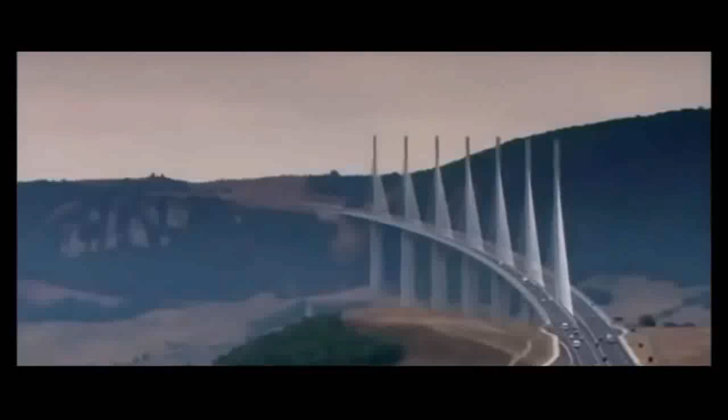As soon as it opened to the public, the bridge was an instant success. But the real test isn't till its first summer, when the French all take their annual vacation. No one ever expected anything like this — numbers peaked at more than 50,000 vehicles a day. At over $7 per car, that's great news for the construction company, who are clawing back their $478 million investment in the project.

This was an epic bridge to build, but it's just as epic to maintain. Thierry and Frank are assigned to P2, the world's tallest bridge pier. This structure is no solid concrete block — it's a series of vast hollow spaces.

Their job today is to test the communication system and electric circuits on each of the 7 structural floors. This involves a 343-meter climb, going hand over hand up a ladder for the rest of the day.

By dusk, when Thierry finally reaches the summit of the pylon, he may be exhausted, but there is a payoff. You get a fantastic view from here, a 360-degree panorama.

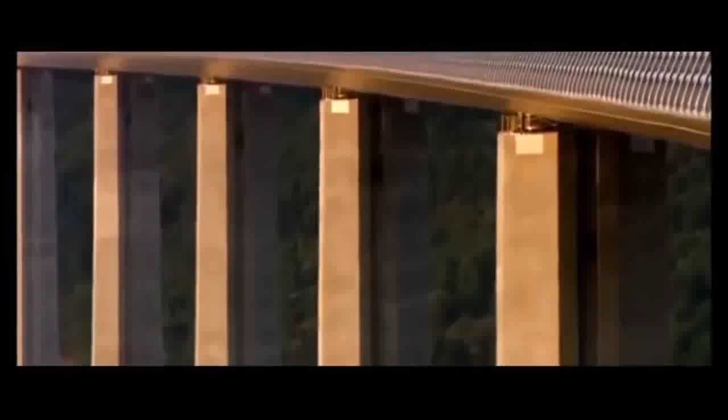Jose zooms in his camera to reveal the man has left his car and is sitting dangerously on the crash barrier. The driver's probably only broken down, but already one man who stopped climbed over the wind barrier and jumped to his death.

Bruno intervenes. Thankfully, it's no more than an irresponsible photographer who's sent on his way.

You could say the Millau Bridge is a victim of its own success. It's definitely become a major tourist destination — 700,000 visitors in the first 9 months. Fortunately, most of them wait till they're off the bridge to take their photos.

It's magnificent. I came 600 kilometers today to see the Millau Viaduct. There's only one thing to say: it's extraordinary. They're drawn because it's a world-beating structure, but also because it's incredibly beautiful, delicate, and minimal.

Not what you'd expect from a structure that's nearly a third taller than any other bridge on the planet.

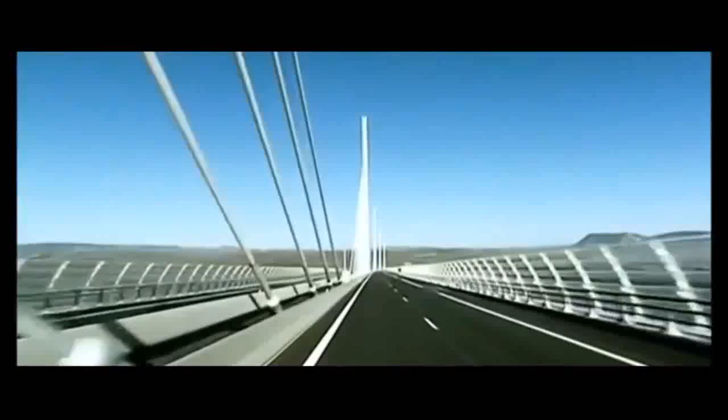Architect Lord Norman Foster achieved his aim to give the driver the sensation of soaring. As you leave these plateaus, you do fly — you fly across this bridge. Literally, you are above the clouds.

And the result certainly pleases the man who dreamt it all up. To see this bridge erected, which I imagined 15 years ago, it's something magic.

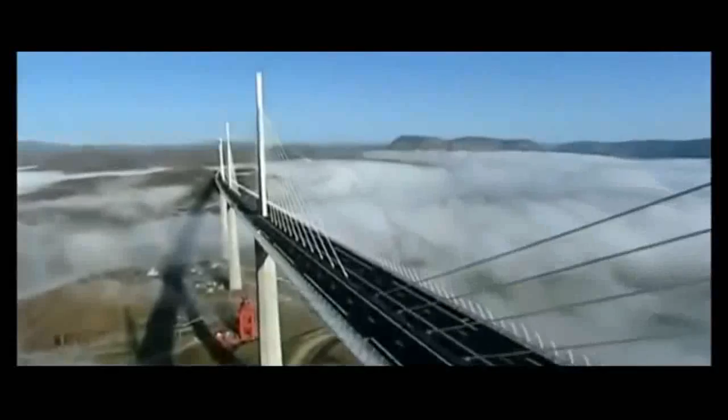This is the longest pure cable-stay bridge in the world, the tallest roadway in the world, and of course at 343 meters, it is the tallest bridge ever constructed.